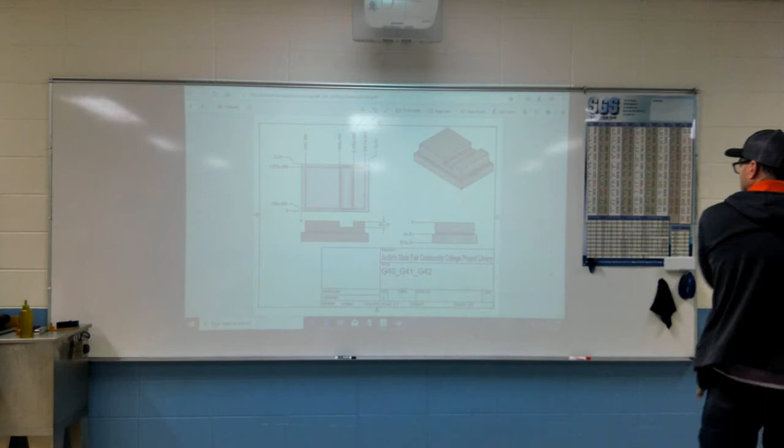So here's what I'm going to do. On this particular project, the way that we run this part is like this. We'll use 1x2 stock. We're going to saw it 3 1/4 inches long. First operation is to hold it out of the vise 3/4 of an inch to the left-hand side.

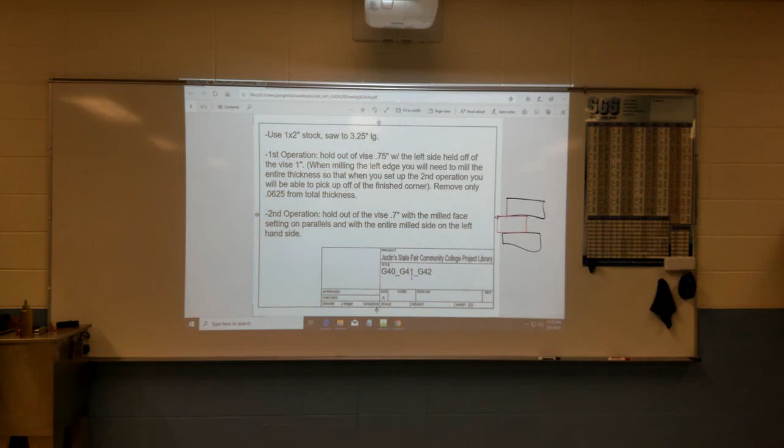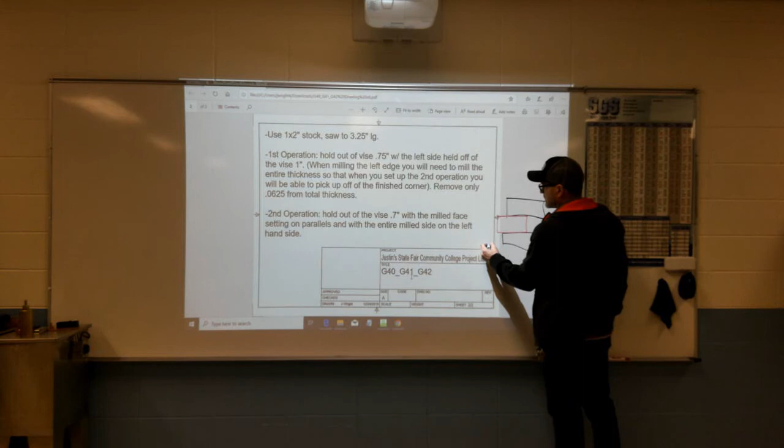So here's my vise. Here's my part. Okay. I think I have a blue around here too. My first goal is to mill the one side sticking out, this side, yes. Go in, go up, and go out. Yes. In, up, out. Okay. So G41, G40. So I got a start point and end point going up like this. Yes. Okay. So that's all I have to do.

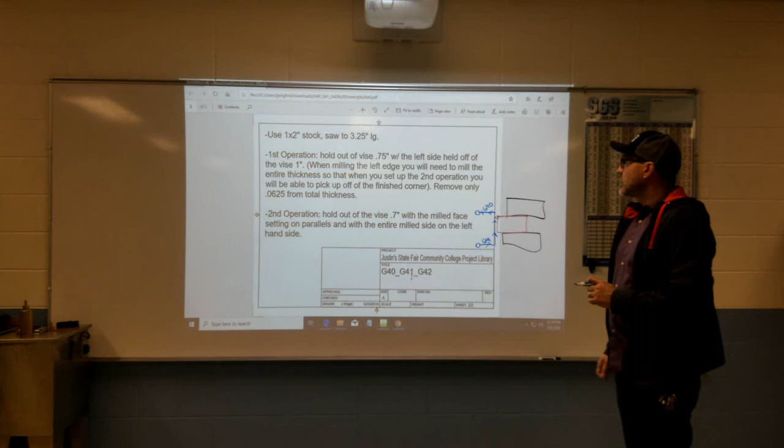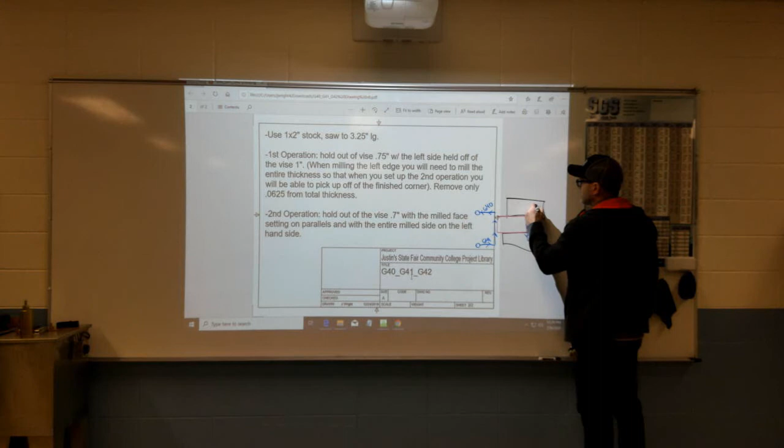Second operation is on the other side of the part. Yes, it's going down all the way. Mhm. Yeah. So on the second side of this, you're going to come in here and do this. It's just the reverse of it. Okay. So that way your cutter is continuously on the left-hand side of the part, both times. This side goes down deeper. This has to go down all the way. It does. So yes.

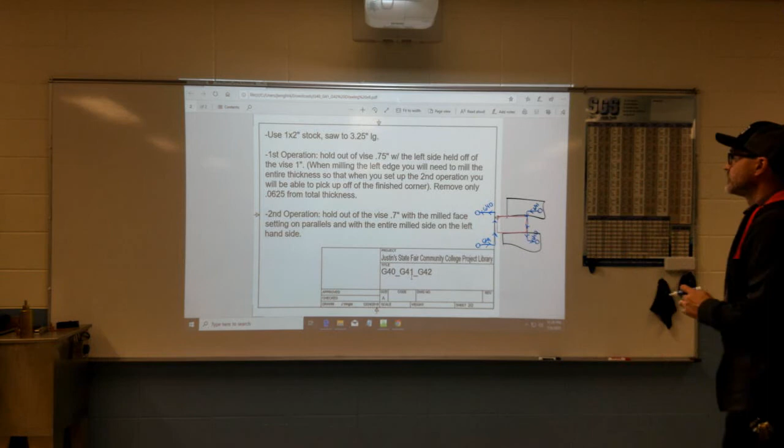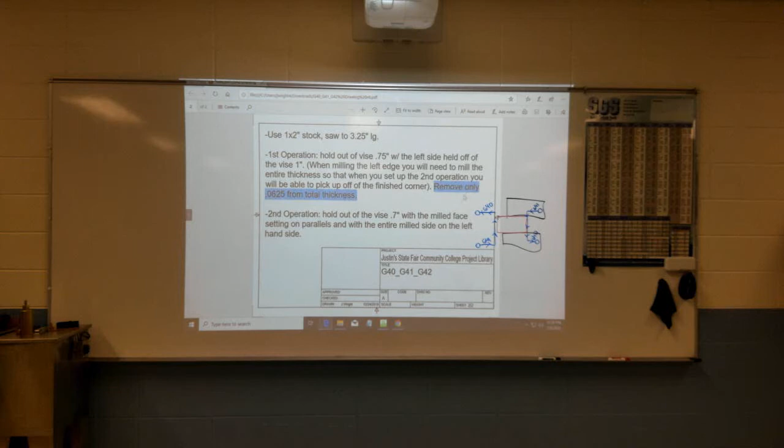So all I want to do, I'm going to grab one more color. Thought I had a green. Okay, now we're going to go ahead and go in and just kind of map out all these moves. No green. Let's see. Use one of these guys. So these will be my moves. I don't have green, so we're going to face mill across it.

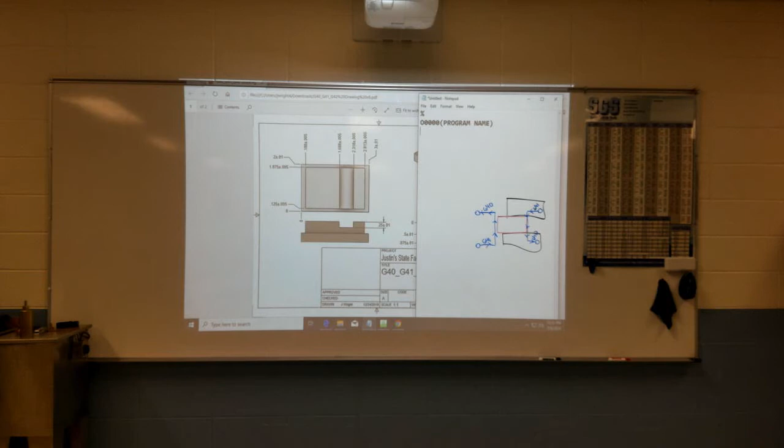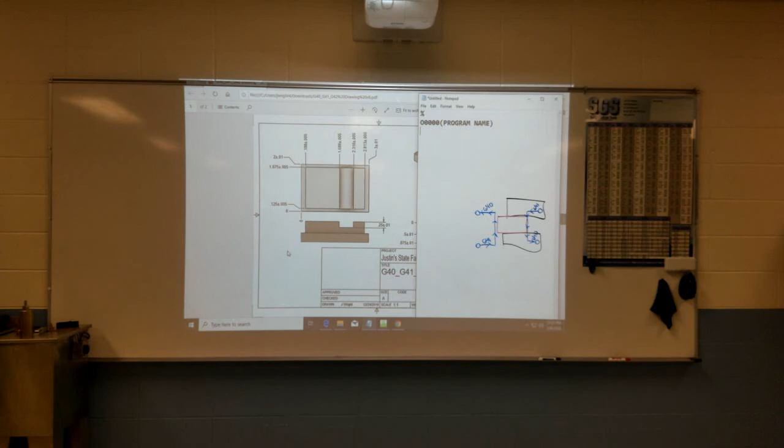Okay. The next thing I want to have is some information about how I'm setting my part up. It said 1 inch away from the vise, stuck out of the vise for the first operation, but it only tells me how I want to pick up the second side. So what I want to do is probably go ahead and probe 4 and 11 using the probing system. If I don't want to do that, still my X0Y0 is going to be in the middle, and I just use an edge finder for it.

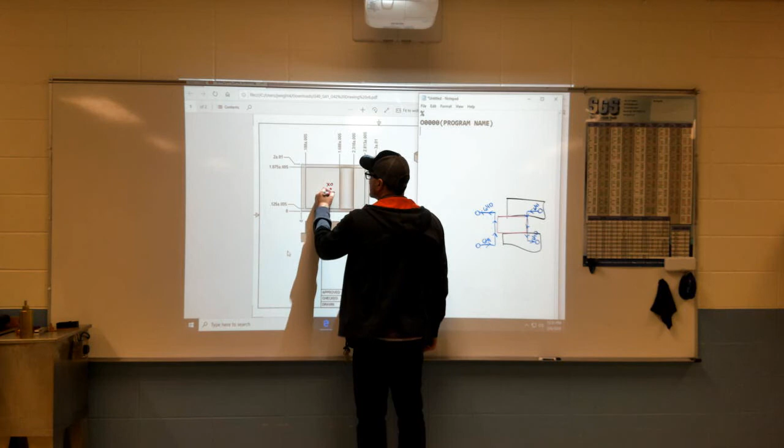So the advantage in making the center of our part X0Y0? Because you can do the same thing on this side and just turn to negative. Bingo. So I can do some symmetry on this part. That's not really the problem, like the numbers, you know what I mean? Figuring out what code means what. Gotcha.

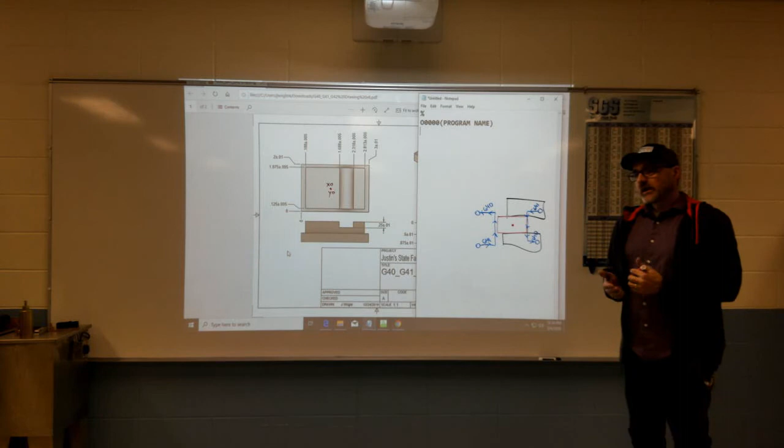So one of the really helpful things in the book is the code list of G codes and M codes, which sometimes helps, but going to the examples, like contouring, or like this one, see, it's spot drill. Yeah, and so that's really helpful. Also, you know how the program starts out with startup lines, and then we have our most commonly used G and M codes, and then cutter compensation.

So I like to look at some of these things. Like here is circular interpolation. That's something we did a little bit of today, and then we also have how to use canned cycles, and it's got examples of all those things for you. So sometimes you can see those, and sometimes it's easier. Here's some different drilling, some jumping up and down over clamps, and some of that other stuff. So some of those things will be beneficial too. This is a good one because it gives a description right next to every single thing that we do.

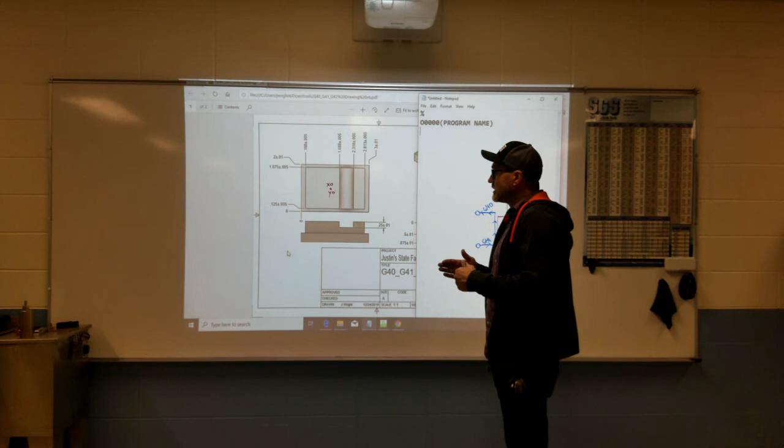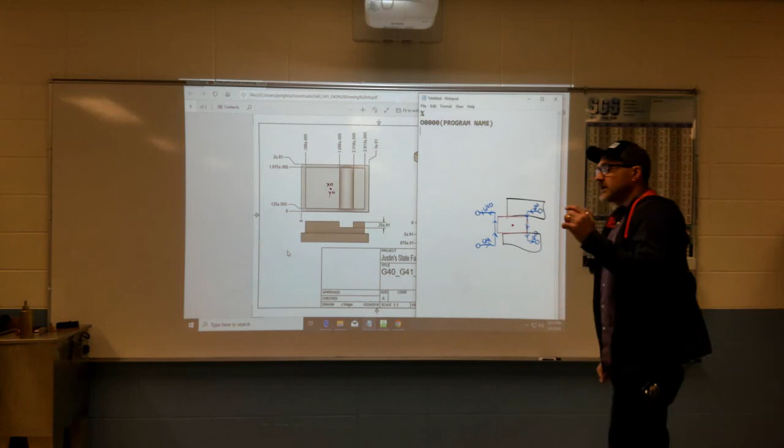All right, so you know the movements that you want to do. So if we use 4 and 11 in our probing, we've probed the center of the stock and sides. So we know X and Y, where the middle of it is, and then we did a single touch in Z, so we know that it's the top of our part. So here's our program. We're going to keep our probe in 1, so that means we're going to start our program off of 2. Yes. 3-inch shell. Okay. And so a 3-inch shell mill will be able to make one nice swipe across there, be good to go.

So I can do T2 M6, and I'm going to call this my 3-inch shell mill. Okay. Now on newer machines we can invert. It could be M6 T2, it could be T2 M6, doesn't matter. So we've got that in there, and then we're going to do a startup line of G0, G20, G40, G80, G90. Rapid movement, inch input, cutter comp cancellation, canned cycle cancellation, absolute programming.

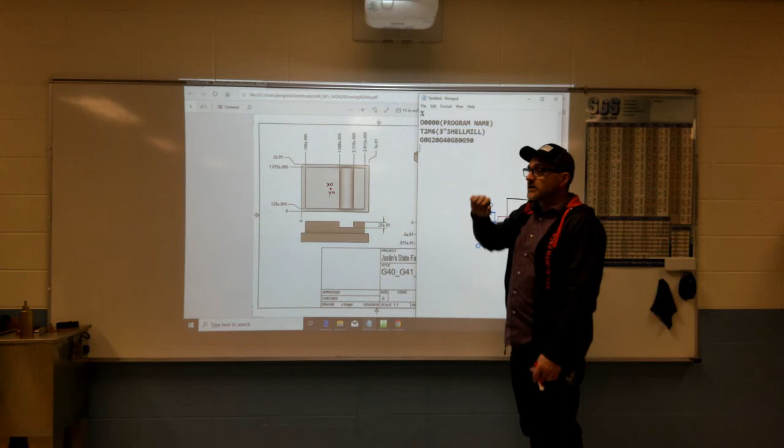Okay. That's on startup lines. All of those commands are listed there. You need to know those because G0, if you had a G1 or G2 or G3 active and you bring in a G0 at the beginning of your program, it'll cancel out all those things. Now, we don't hardly ever run metric. We've never ran metric in your classes. So all of our machines are currently running in G20. But if I put that inch input, it just takes one code, and then I don't have to worry about it anymore.

Cutter comp cancellation, in case somebody stopped the program before I got to the machine and they were in the middle of cutter comp. Sometimes we'll go over to a machine and we'll stand there for 10 minutes trying to figure out what's going on with it, not realizing that somebody either had it in cutter comp, in a canned cycle, or in incremental. So you only need to put that code once? I put those at the beginning of my tool changes. Right. So I put it at the beginning of the program and every tool change. That way I can start up the program anywhere.

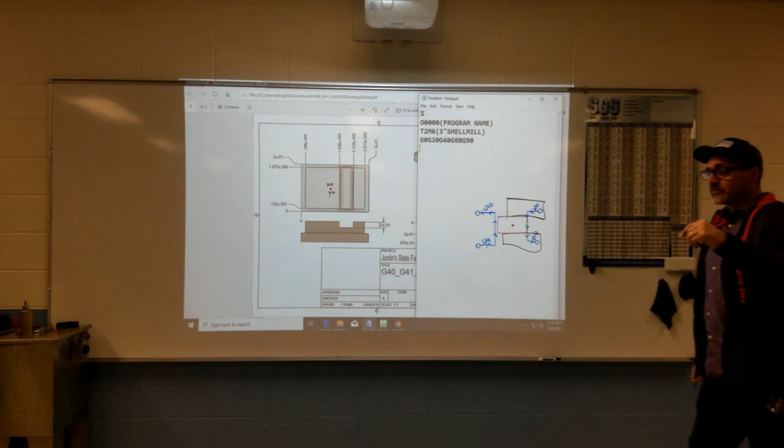Now, there's a sequence restart or starting at any point in the program too, but this is always a good habit to start. So I gave you 2 examples in the book of common startup lines, and are all of those things necessary or not? So let's look at those. Okay, is a safe start necessary? And here are some examples. Two of the same thing. See, one has the G90, G54, G0, and the other one has just a G. Well, they're just kind of rearranged differently. Some information's there, some information there. Is one way better than the other? That was kind of what I'm asking you in there.

So I've got my X0, Y0, my Z0 on the top of my part. I've got my shell mill not started yet, but I'm getting pretty close. So I want to go ahead and call up my work offset G54. At this point, I'll typically go ahead and make my X and Y movement. I wouldn't have to, but I would like to go ahead and combine some stuff. So if this part is going to end up being 3 inches long, where do I need to start my shell mill at? Or you want to at least be a little longer, so negative 3.5. Negative 3.5 will be pretty darn good.

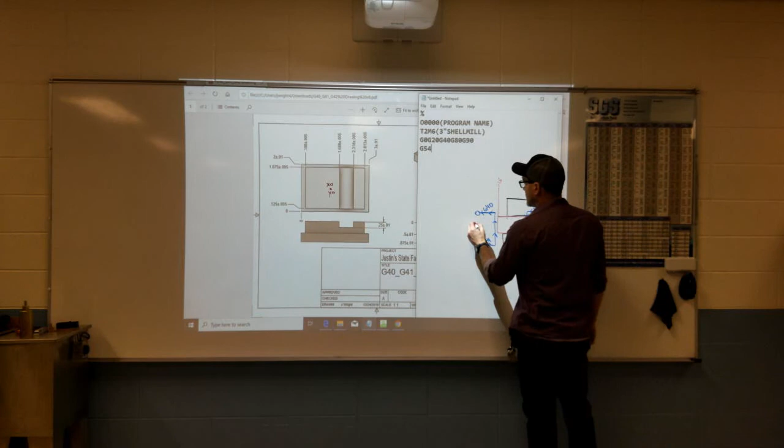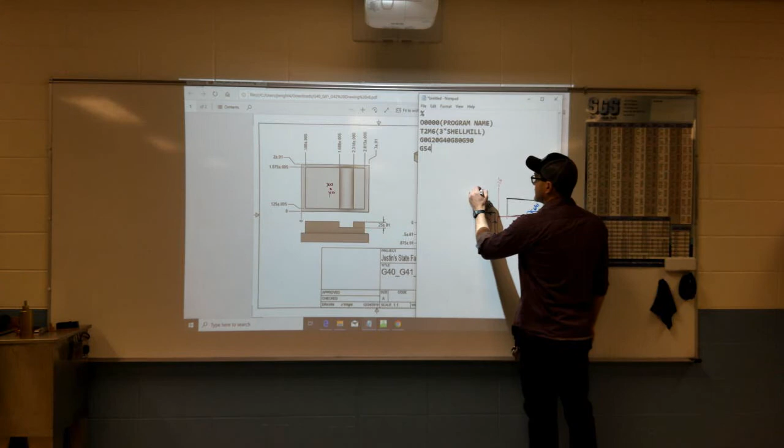So we'll do the shell mill in red, and let's just say this is a 3-incher, and it is going to be X minus, what did you say, 3.5? Mm-hmm. Okay. And it's going to be at Y0, right? Because this is right on center line.

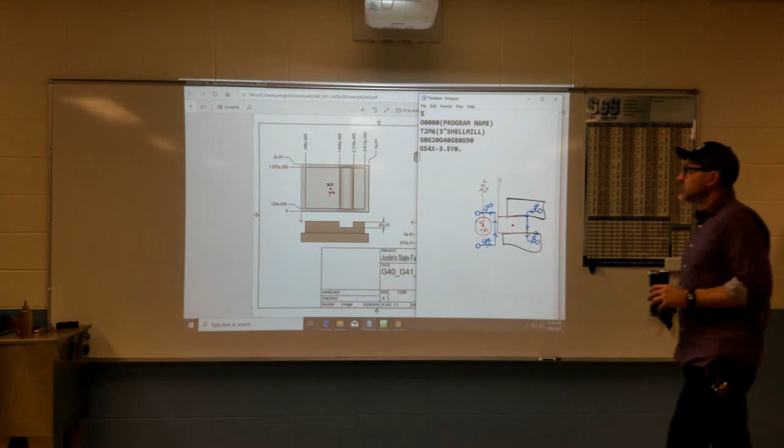So X is going to be X minus 3.5. And Y is 0, yes. Make sure you have periods after there. Periods matter. On periods, do you put them in everything? I put it in everything that's a whole number. So obviously I've got 3.5 here, but I don't put a period after the 5. I put it after the Y0. But if I had a spindle command after that, S3500, I would not put it there.

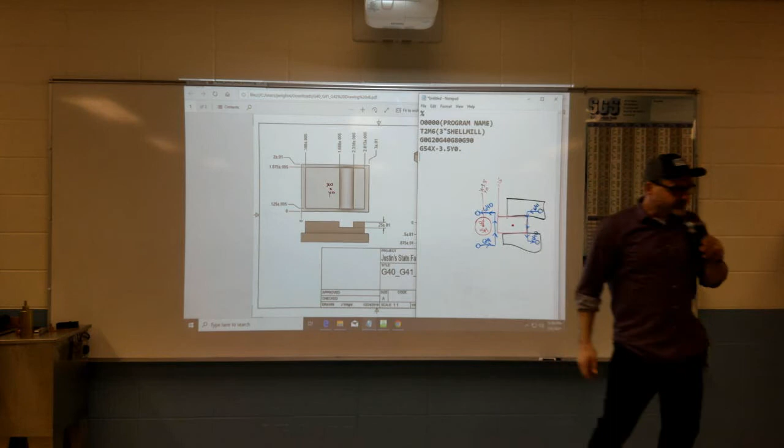If I was going G1 4.5, just a point at 4.5. Just a place where it needs to designate a whole number. Because if I just put X, Y0, it'll go to the smallest possible scenario, which in this case would still be the same thing, 0, 0. But if I wanted to go to 1 and I didn't put the decimal point, it would go to 0.001. See what I'm saying?

Yeah. Okay. So I've got this part started. I've got my tool called up. I've got my safe start set up. I've got my X and my Y. I don't have any spindle speed, and I don't have any downward movement yet. So do you remember what the spindle speed was that we used on that? 1018. 1018 sounds correct to me too. So S1018. No decimal point after that, that's just a number. That starts my spindle up.

We pre-calculated that using the 3-inch shell mill. It's got 5 inserts in it, and it is in aluminum, so probably a 800 surface footage is what we had used. So that starts up our spindle. Next thing we need is a G43. G43 gives a signal to the machine that we're getting ready to put a height in here. The height that you put in the tool library in geometry, that's where it's going to draw from.

So we're going to put G43 H2. You will put a Z, but right now you're going to have H2, so that H matches the T. And then you're going to put a Z of 1 inch, so it's going to go down to 1 inch above the part. I want to do a couple of safe moves there: 1 inch above the part, and then Z 100 thousandths above the part. That's still in rapid, because up at the top underneath that T2 there's a G0. We have not gone into a feed move yet.

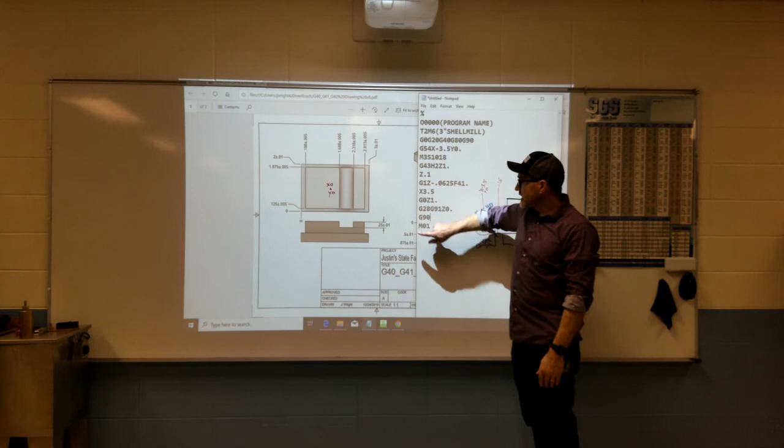To be 100% honest, you could put none of these things in here, put an M01 or M1, and then put a tool change in there, because tool change has to go all the way back up. So it could actually - but you don't need to change tools. Yeah, you will need to change tools. This is just a couple different ways of doing this.

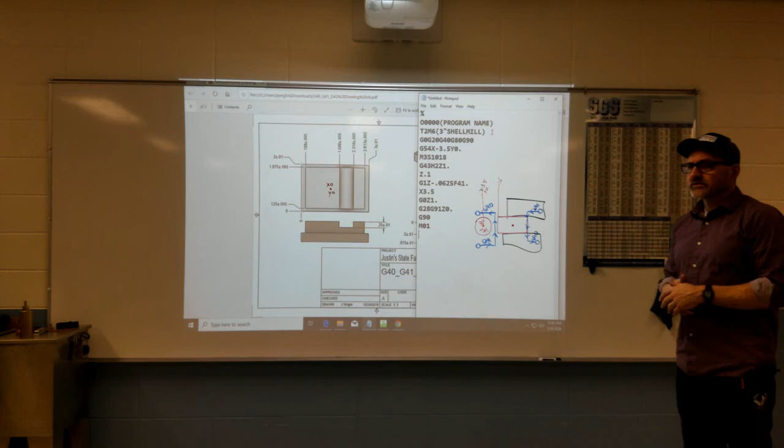I think everybody's got their own kind of groove on this, so it's kind of important to figure out what your groove is. Like when I'm writing or running a program I've just run, I kind of know the things to look for. I know my first lines are typically my startup lines, and since I've written enough of them, I kind of know how the block of code lays out, and I pretty much write it out the same way every time.

All right, so now I'm ready to start. I'm done with that shell mill. I'm ready to go into my next tool, my half-inch end mill, and start running the sides. So that's going to be M6, T3 - we'll just put half-inch, 2 flute end mill. Okay, so I can borrow this code here, just copy and paste it out.

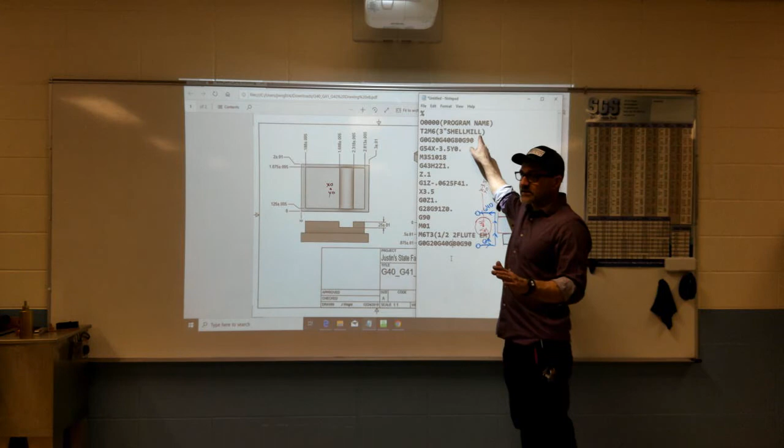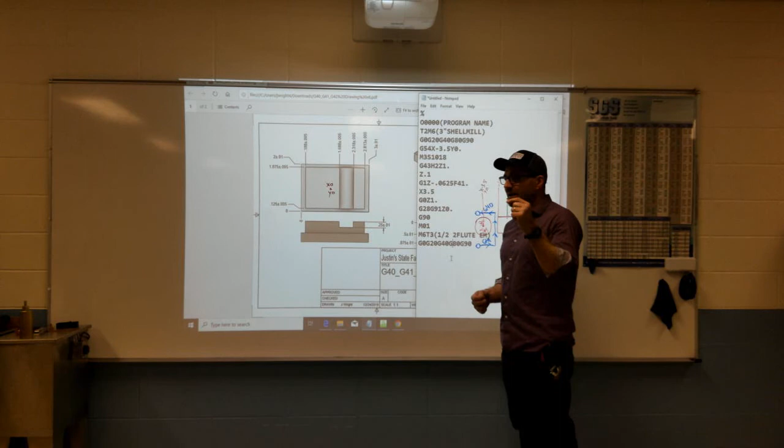For all intents and purposes, we would actually be able to not even put that in there. We've not moved away from 54, all of these things stay the same. We should just be able to stroke right on through, not even put a work offset, just in case. Exactly - if I don't have sequence restart turned on, setting 36, or if I stop my program midway and want to start at a tool but haven't run anything else, I want to give myself some safety factors in there so I can get started back up again.

Okay, so I'll do some of the same stuff. All of these things will be brought back into it, but there's just going to be a little bit of different X and Y values. So we're going to have a X value of negative 2.5, okay, for X, and negative 2 for Y.

Okay, and then what do we have for an RPM? Do you remember? 4,800, 4,800. Okay, and so now I've got T3, so my H3, H and T have to match. So I go to 1 inch and I go to 100 thousandths. I'm still in a rapid move.

On this side, I need to mill the entire height of that part. So on this side, my end mill needs to go there. Over here, it just needs to be like that. Okay.

So you already got the numbers from that. That's good. So we'll go ahead and go on down. Our part is just shy of 1 inch, but our top of our part is Z0. So we're going to go down to Z minus 1 should take care of us. Okay, so that's still in a rapid move.

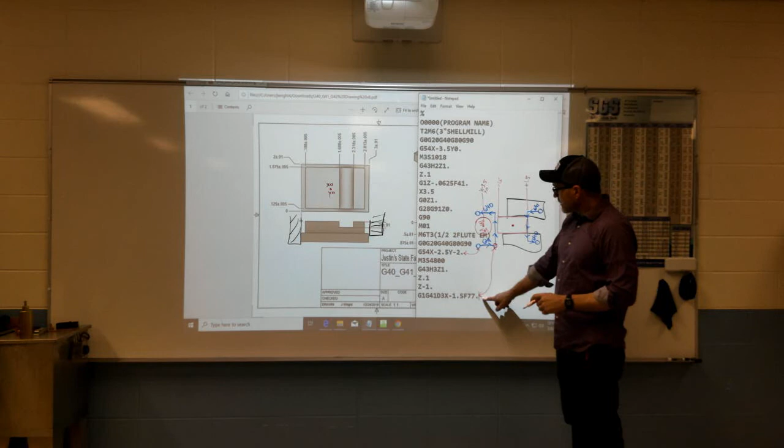Okay, so here I am ready to start this travel up.

And now I'm going to go to, I'm already at Y minus 2, right? So in keeping that symmetry going, I'm just going to go to Y positive 2. Okay, from there on out, I'll just travel up to Y, 2 inches, plenty of room, more than enough room. Now I'm just going to travel back here. You with me?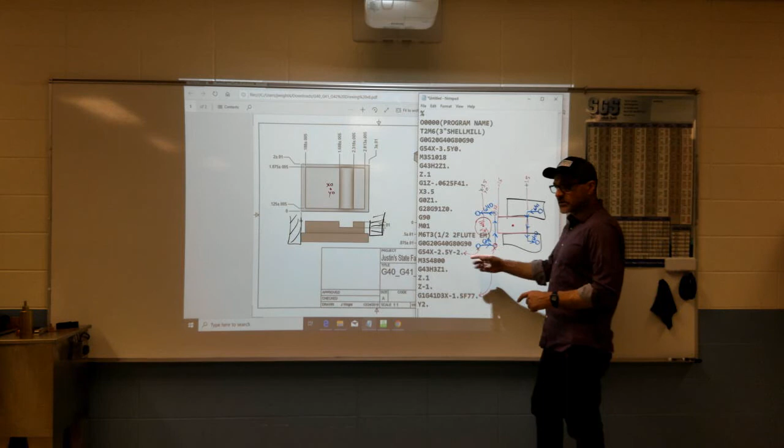Are you on cutter compensation? Yeah. Okay, so all I'm doing is cutting up this side. So I came from here to here, turning cutter compensation on. You with me? Yeah. Then I travel up here. That's this move, it's right there. Okay, now I got to turn it off and come away from it.

G40 X minus 2.5. And that turns cutter comp off. So this move is right there. This move is right there.

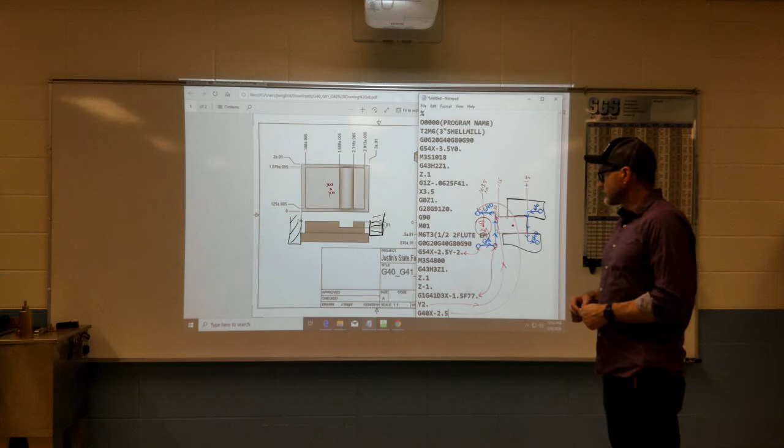Make sense? So G1, G41, and D3X, that turns cutter comp on? No, this turns cutter comp on in a feed move. The X is the positioning of it. Right.

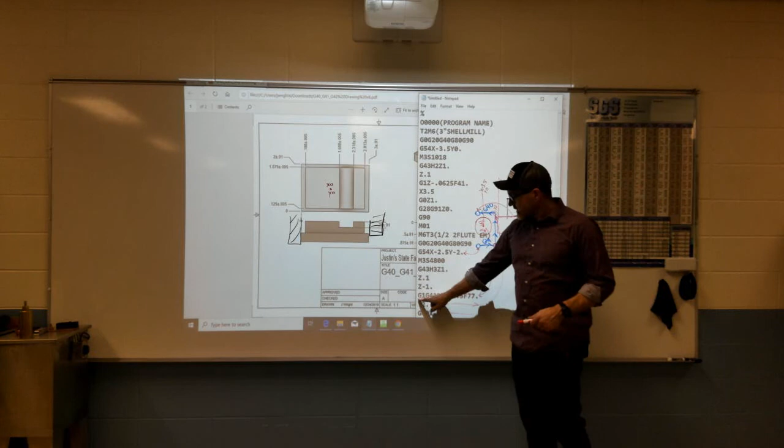This is a feed move, right? These two, this is cutter compensation to the left. This is what diameter are you using? Well, you're using tool 3, so your diameter comp has to be 3. Okay, so the D3 is diameter. Got to match that. Okay.

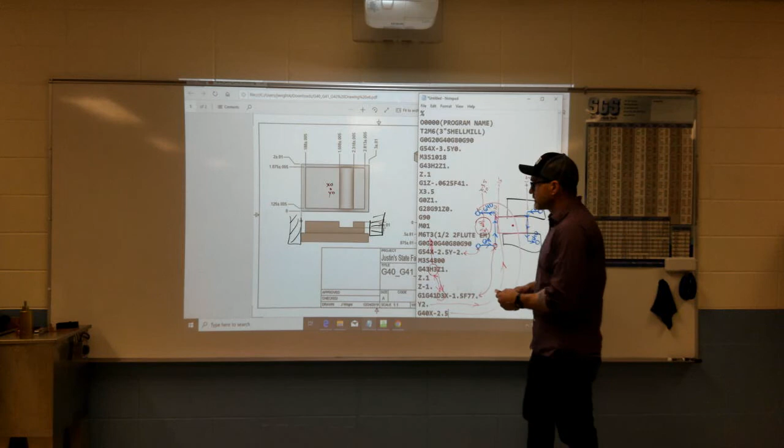So you got a couple things. They all have to match. All 3 of those pieces in that string need to be the same thing, right? And so that's just the X position, and then that's just the feed rate.

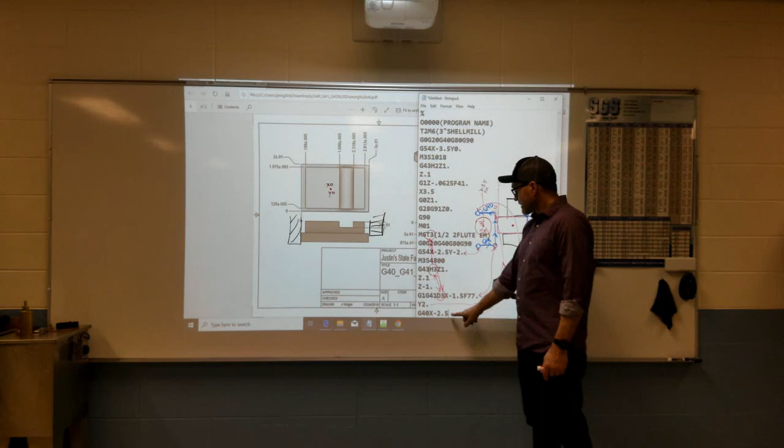Okay, then we're going to go up to Y2. We are going to turn it off. Then go over, it's got to turn off in a feed move. So we've got to feed away from it. You can't just do a G40 at the end of it. So that takes care of that. Are you with me there? Okay.

I'm not sure where Sean is. I was really hoping he'd be back here. Okay, I'm going to erase some of these things.

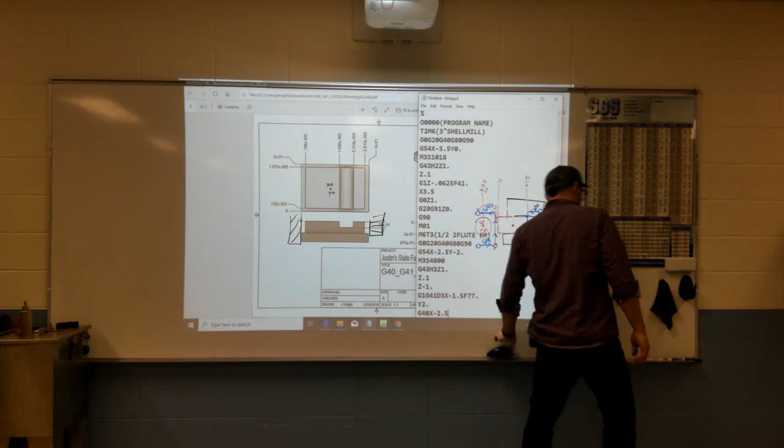I'm going to move up in this program some. We're not done with this tool yet. So all we did was come over here and turn cutter comp off. Now we need to move up, over, and just do the opposite, then reverse it. It's super simple from here on out.

Okay, so I've turned cutter comp off. I'm in a feed move, so I'm going to go G0, Z.1. That puts me up above my bar. Now I'm going to go to X2.5, still in a rapid move. I'm going to go G1, and go Z minus 0.650, because I said the part needed to be sticking up 3/4 of an inch. I don't need to put a feed rate on there because my feed rate from here still tracks. So now I'm over here at this point.

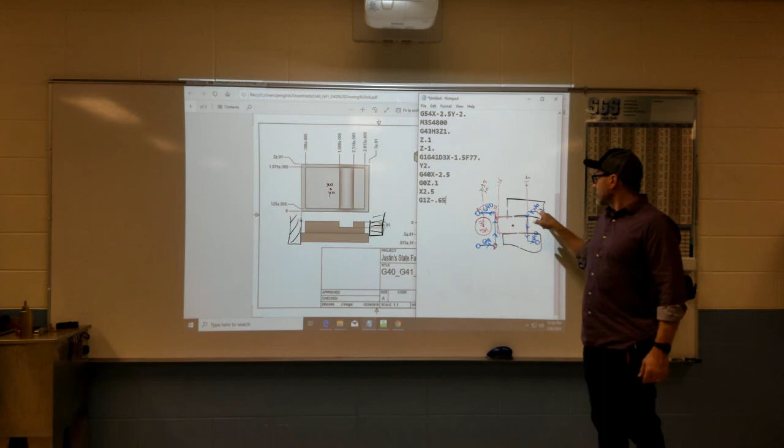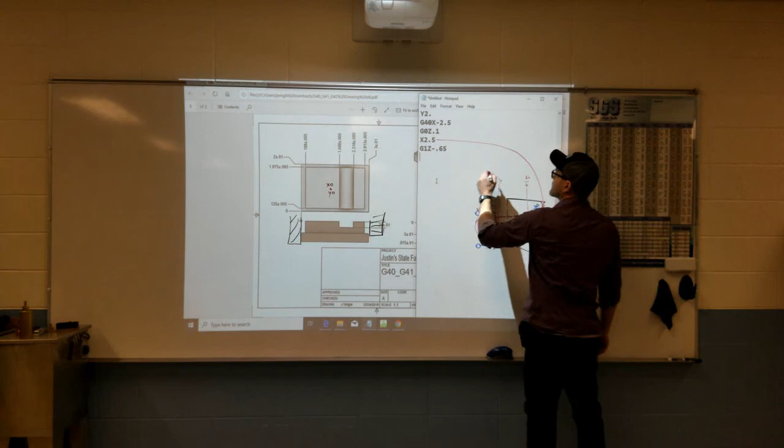I'm going to move up just a little bit, and then we'll draw some arrows as we go. All right, so I've rapided - can't see the Z move, but I'm down where I need to be.

Now I'm going to go G1, G41, D3, X1.5. So I'm right back where I was, right here again. These two things are mirror images, so I'm just going to go like right there.

Okay, now I'm going to feed down in Y. Is it -2? Yeah, it must be. Yes, please. Now I'm going to do that same G40 move, go into X2.5 maybe. Okay, and so I'm done - that's the whole backside of my part.

So now all I've got to do - yeah, well, I need to finish this program out. So I could do a G28, G91, Z0, then G90. I could do a G53, Z0, whatever I want to do. And then I won't put an M01 there, but I'll put an M30, and then a % sign into my program. Yep, so good to go there.

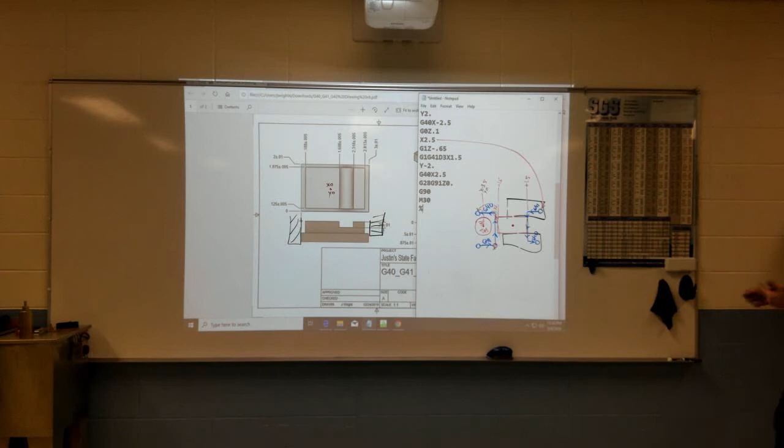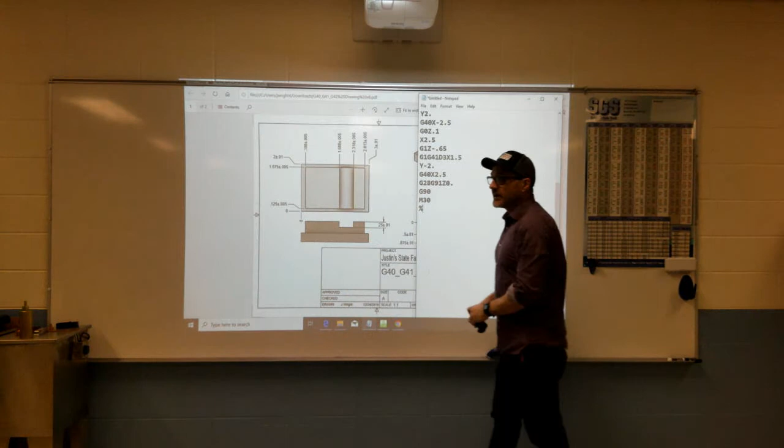I think it's really good, especially in those kind of beginning moments, to kind of draw the thing out as you go. I have a drawing on paper. Yeah, it helps - you're welcome to take as many pictures as you want, just to help remind you of what we're doing. I'm going to go ahead, since I'm already here in this notepad, and just keep on writing on it, because I'm not planning on running this.

So I will start out with my shell mill again. I'm going to change my numbers just a little bit, but I'll go ahead and do a duplication of this. I'll call this 1. Okay, the only thing that's changed here is where my X0, Y0 is.

We milled that one side all the way down, and then we milled that one side shallow. We flip it over. We wanted that one side to be milled all the way so we would have a good corner to pick up on. So now we can come in here and do a top single probe in Z, and then a corner probe for whatever corner that might happen to be.

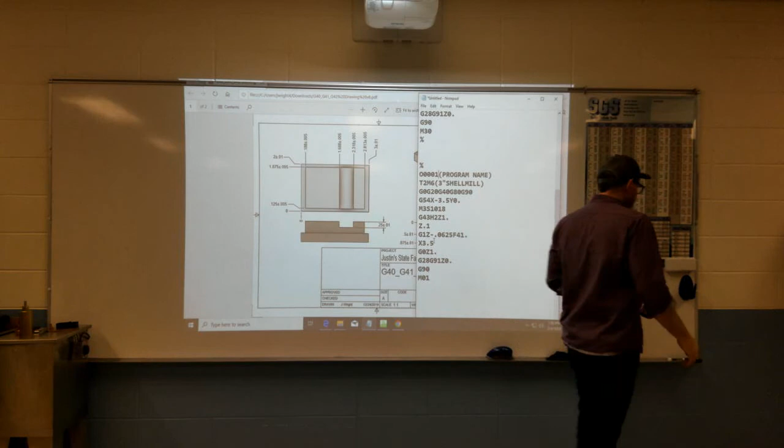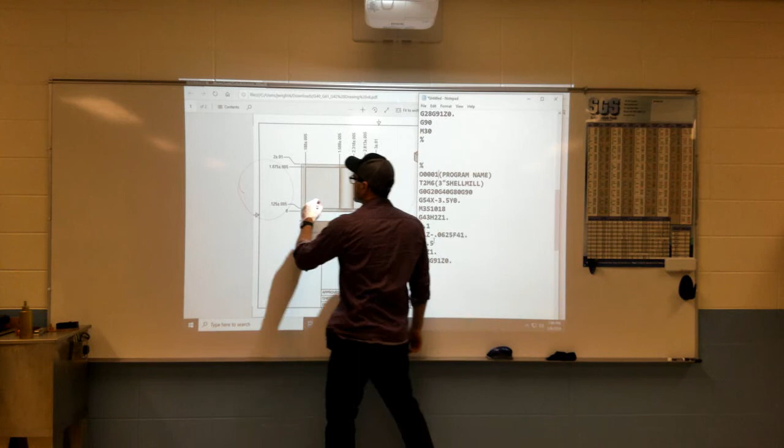Actually, probably 1. So I've got my shell mill, turned it on. I need to change both my X and my Y. Where do I want my shell mill to start out at? Same thing as we had it over here - negative X-1, X, Y-1. No, that's probably more for the end mill. So X0, Y0 is down this corner.

Okay, I've got to come off the part at least an inch and a half. So it's 2 inches thick. 2 inches? Yeah. Okay, let's go -2 inches, and Y0. Okay, that puts me in the middle. And also off - yes, he's off to the edge.

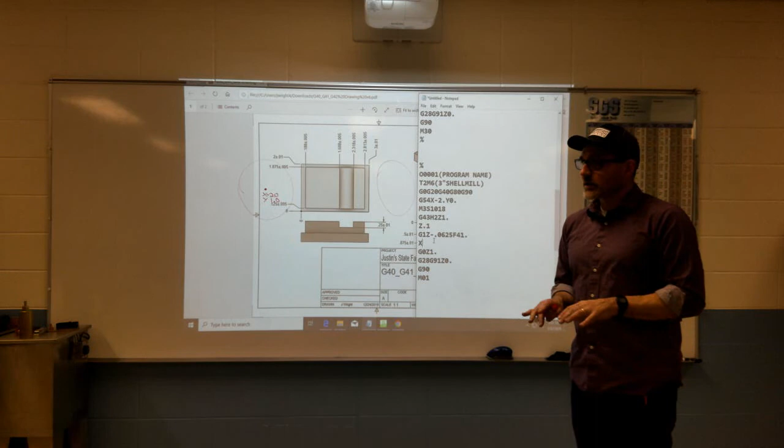So see how all that stuff kind of stays the same? That's why I really encourage people, if you have a laptop, you can be sitting here doing it on the laptop as I do it, and copy and paste along with me. I like the idea of doing it on paper, but man, it's hard to copy and paste on paper and do it with the same speed. So like a couple guys - Brandon, he's one of the guys who is quick to be on the laptop as he's doing it, that way you don't end up having to go over to a computer and work off of it like that.

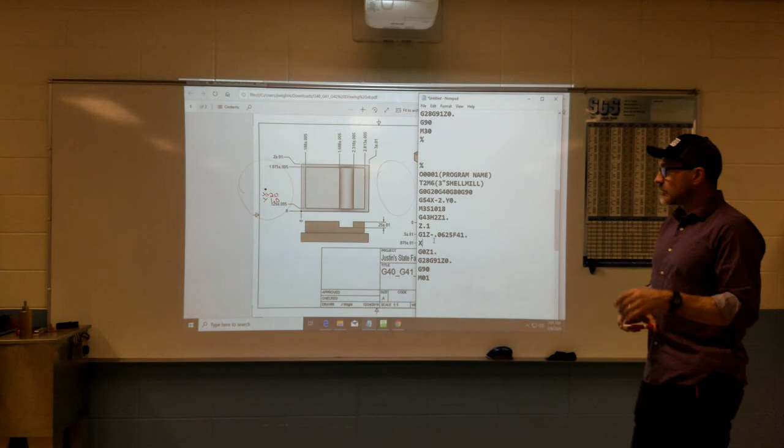Notepad will run on any kind of Windows cheapo computer, so you don't have to have anything fancy. So if you've got a laptop, it won't hurt you to have it. So we've got to overcome at least 3 inches plus the radius of our tool, which is 1.5 inches.

It's 3 inches long, so do 4.5 - at least 4.5. 4.5 will take us off the edge. So let's go 4.6 just to be on the safe side. That takes care of us. We're off of the part now. We're done with that.

Okay, so now I'll go ahead and grab my 1/2 inch 2 flute end mill, and I'll go ahead and grab that out here. Copy that.

Paste that in. So there's my tool. There's my startup. My X and Y changes. My spindle speed stays the same. This stays the same. This will change. Let's see, what will it change to? It's got to go down 1/2 inch.

Now, here's the tricky part on this. We actually have to mill down lower than 1/2 inch because we took 62 thousandths off the top of our part. This is really the one and only program that will run like this. From now on, I want the top of the part to be Z0.

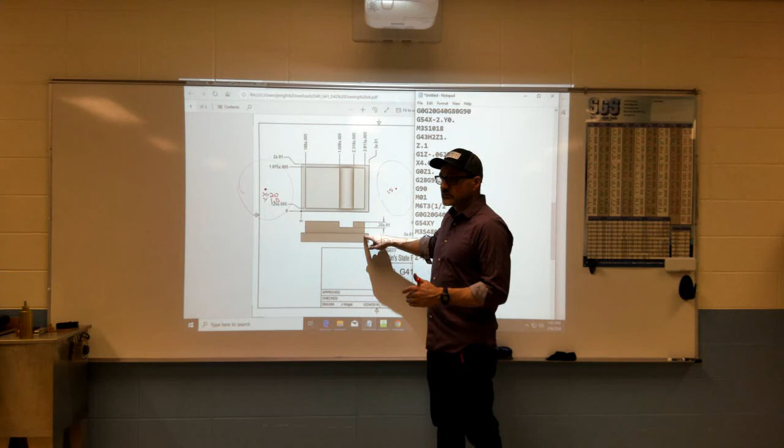Overcome that area. Yeah, I thought you were Sean.

Okay, so I'm now down to 62.5. But I did not put my X's and Y's in order yet.

Trying good? Happy with it? Good, looks good. Wish the chamfer was a little bigger, but it's in print, so. Yeah, it looks nice. I didn't know it was sweet. That end mill is sweet.

I'm hoping to. I can't do it this budget year, but as soon as this budget year is over, so July, I will probably buy it. It's probably the end mill that I'll be going to for now. Jeff goes, you're the only one in class who can get one of those. But honestly, luck of the draw.

I didn't want to go get my keys. And the only reason I did that is I didn't want to go all the way upstairs, grab my keys, come back downstairs, get into the tool room, and then come back.

You said those were like double the cost of our carbide inserts? Those are about $75 a piece. That's what we paid for them. That's not that bad, I think MSC sells them for like $130. We paid $75 for those. So I'm gonna start doing those in 1/2 inch, and I think I'll probably start doing them in 3/4 inch.

So hopefully next semester. The bad part is those will cut right through vices. Oh yeah, those will cut right through anything. I know, yeah. Vice jaws, who cares? I'm super happy with them. You can't hardly spin them fast enough, you can't hardly feed them fast enough.

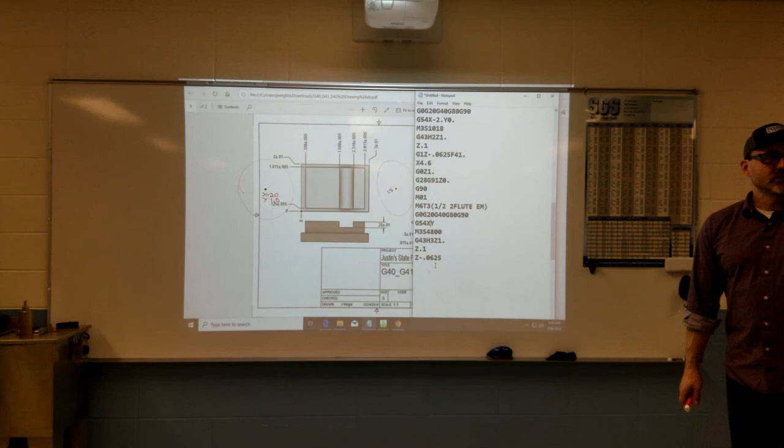I will tell you what I put the detail grinder use to cut stuff with, but we don't want to do it. Right, put in a 1/8 inch carbide and they'll go. Sure, yeah, guys did that, definitely you can come out with like this. You can easily come out missing digits.

That's pretty terrible. It's a terrible weight loss program. He knows how sketchy it is. That detail grinder spins at... it's 2,200 RPM, yeah, I mean, it can take off, that's for sure.

All right, we've got to come - we've got to position our tool somewhere around here. I think you already had the number of 1-1. We've got to turn cutter comp on. We've got to go around this part.

We're already at depth. We need to figure out where we want to start at. I think you had already told us: X minus 1, Y minus 1.

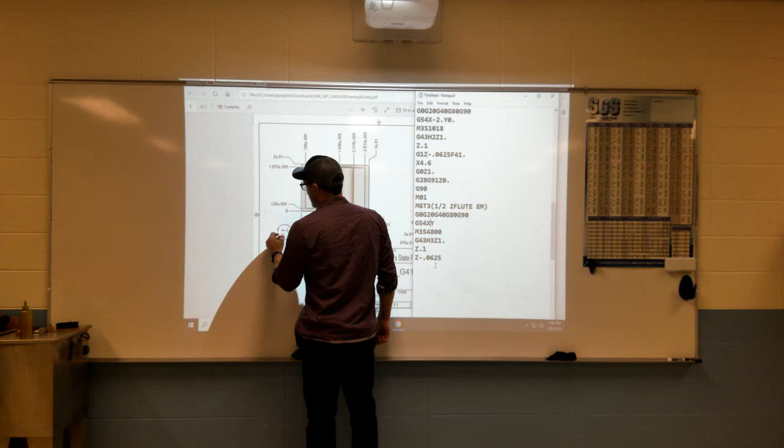That's a little far out to start, but that's going to be fine for us getting going. So that means up here I'm going to hit X minus 1, minus 1. Okay? So there I am.

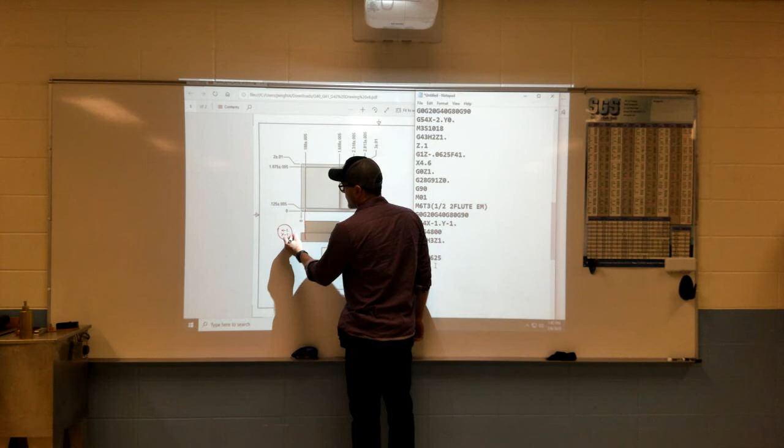I'm already at the position of where I need to be. So what I need to do is travel from there. I need to come into this line. So that corner is 0, 0, right? It is. This corner right here.

So I want you to travel in X to this edge that I just drew. It's 1.2588 coming, right? What's that? 1.88, 0.188. So don't overthink it, that's all you got to do. You've now created this tool, it'll be positive 0.188.

So I'm going to go G1, G41, D3, and I'm going to go to X 0.188. Now that drives me right to that edge. Okay? So now all I got to do is go up all the way to here.

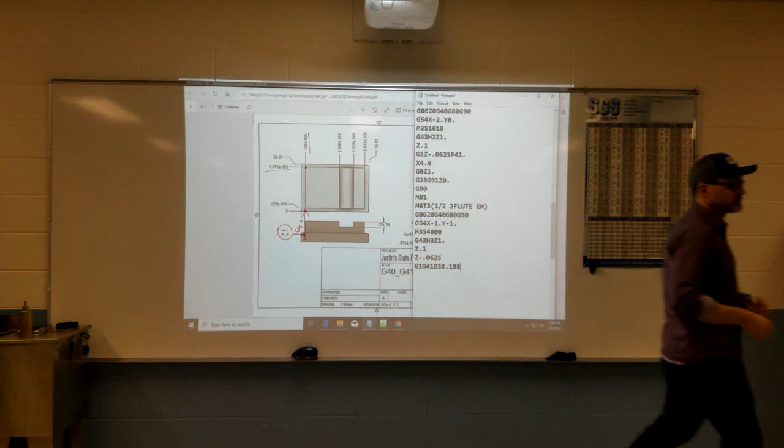So where is that? 1.8, got to go to step 1.875. Y 1.875.

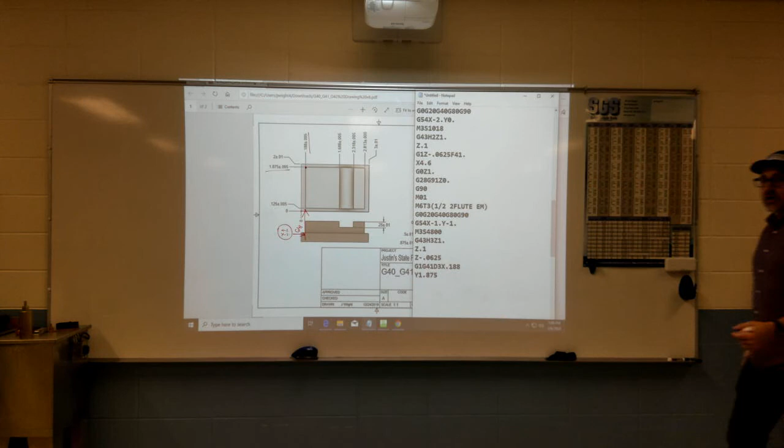1.875 negative, right? No, we don't have symmetry anymore because zero's here. So what is this? Look, there it is right there. 1.2, 0.125.

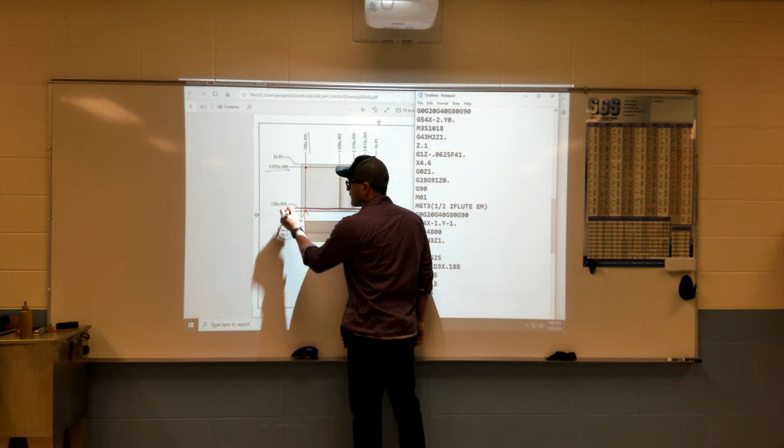Yeah. Okay, so I'm down there at that bottom edge. Now I need to come all the way back over here. This move gets a little bit different than what we've had before. So we're going to go all the way across here, and I actually want to travel beyond that. I want to go all the way to X of negative 1. So you would put X negative 1, and it'll just take it right across it. Yeah, just going to go right on past it.

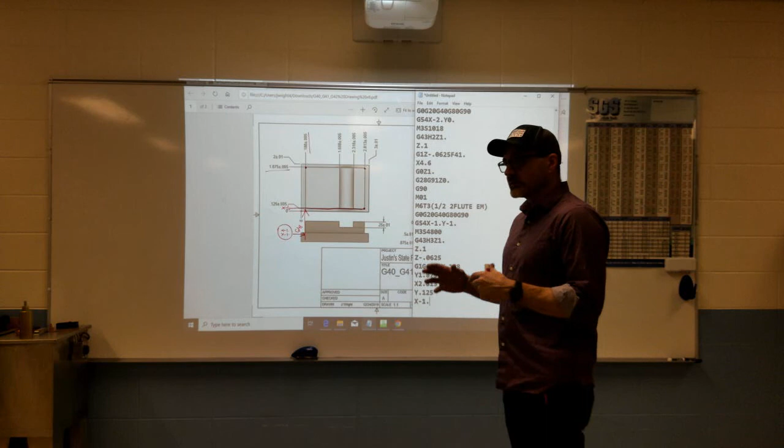X minus 1. I mean, if I'm trying to really, if I'm going to make a million of these, I've tightened my moves way up. But for what we're doing right now, it's okay to be just a little bit chunky, come off there, just a little bit of air cuts. So now I'm going to come down here to Y of minus 1 and turn cutter comp off.

Okay. From there, I have milled the bottom side, now the top, I've milled both sides. I've milled these edges. I've milled all the way around this slot. Only thing's left, I'm over here at negative 1, negative 1.

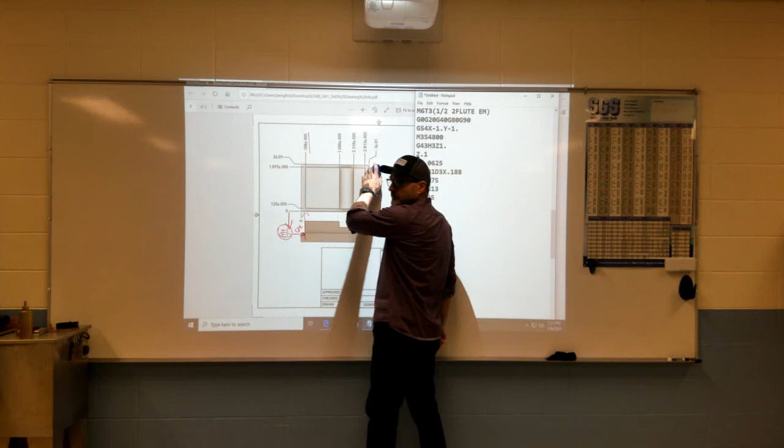Okay, I need to get in here and I need to cut this slot. Here's how I want you to do this slot. There's an easy way to do this slot, there's a hard way to do this slot. I want you to do it the hard way. Anybody can do it the easy way.

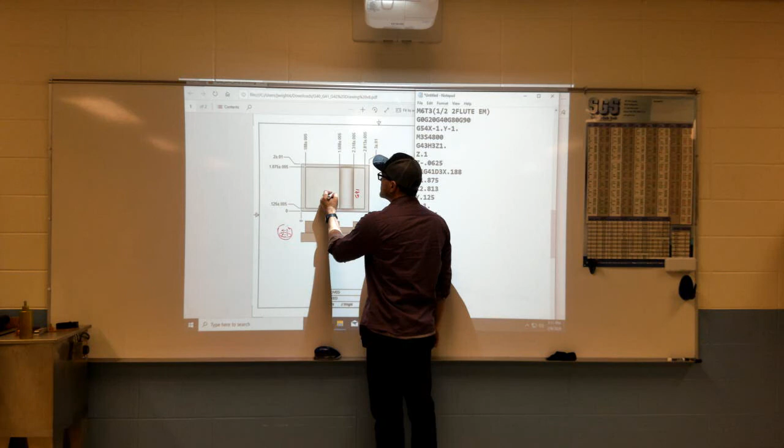So I want you to go up this side, going G41. Then go down, going G42, right? I actually want you to go up the other side and go up G42. So here's how if I'm going to make this part. I'm going to come up this side, turn cutter comp on G41. I'm going to come around and I'm going to go down and turn cutter comp off, all in G41. But I need you to make sure that you know how to use both G41 and G42.

So you want me to go all the way up and come right back down? I do, I remember you saying that. Yeah, so I'm going to change some colors here. So I want to do this is your G41 side. This is going to be your G42 side.

So would I machine it like this under normal circumstances? No, but I want you to know how to do both of these things. You'll rarely use G42, but if you know how to use it and you don't use it, that's okay. But to need it and to not know how to use it, that's a problem.

Okay, so here I am. I'm over here, I need to travel over to here. I can travel straight from here and turn cutter comp on right here. Kind of a long move, but I can do it.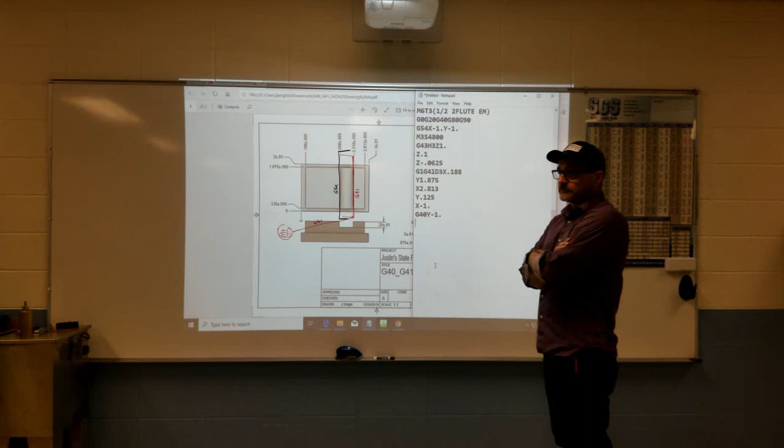Say plus 2. Plus which one? You gotta have your quarter inch dimension plus your 62.5 thousandths that you already took off the top of the part. So it's a quarter inch plus 0.0625. It's 6. You said 6 point what? 25?

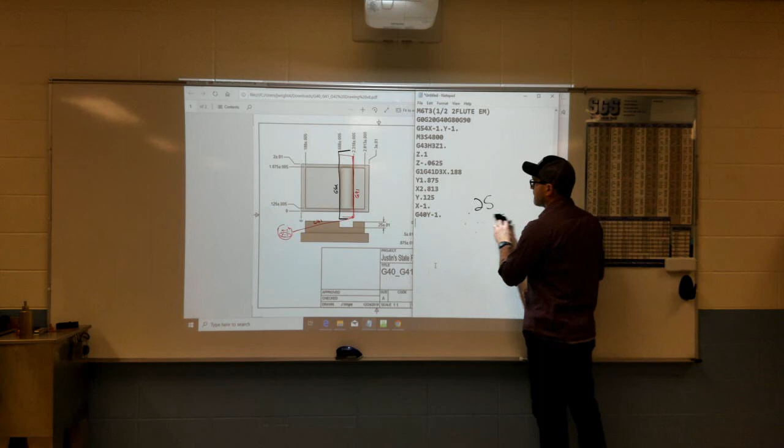Is you point. Is you 0.875 plus 0.25 plus 16th inch. You did 0.25 plus 0.0625. 0.0625. Is you 0.3125. 0.3125. So 5/16. Here's both of these. Okay.

For some reason, when we put the calipers on and measured this, they didn't come up square. Did you square them when you put them in? Yeah. I used the 4-inch square to put them in, and beat the crap out of them when I did. So let me ask you this. The bottom of the vise is like this, right? Right. Did you have that blade stretched all the way across both sides? No, that was my problem. That's your problem. So you need to have that blade stretched all the way across it.

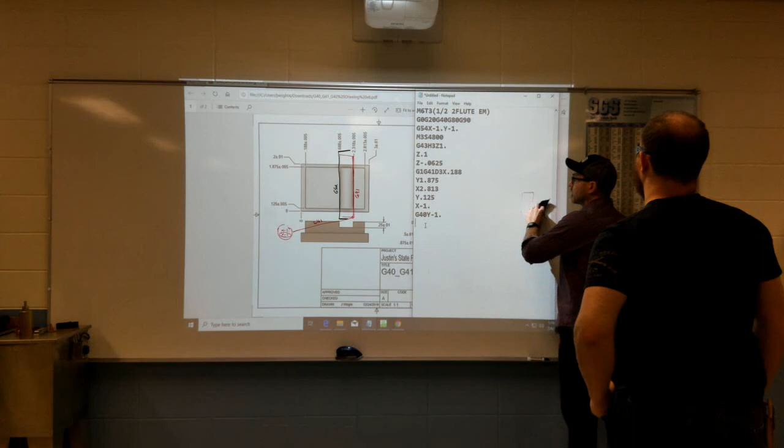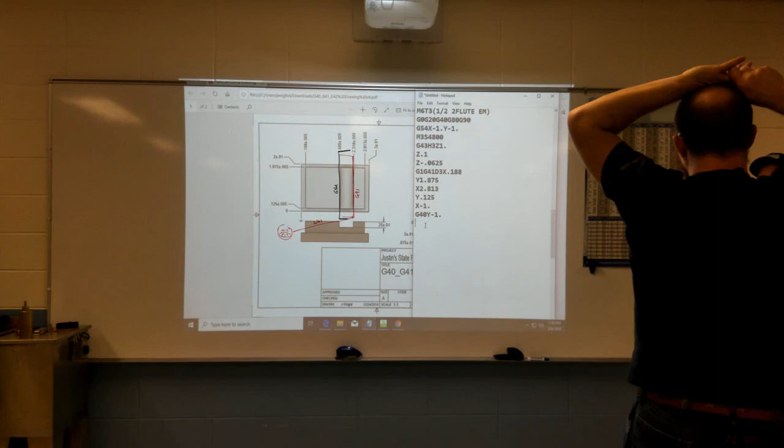Otherwise it's not. So use the thin side instead? Yeah, the thin long side needs to go down first. Gotcha. That way you can span that out much further. That's why I don't like people using the 1-2-3 block for short stuff like that, because your material's 1 inch and your 1-2-3 block's 1 inch. It gets stuck inside there. Well, the way I look at it, you gave us squares in a box, use them. I didn't realize to flip it that way. Yep, you're good. So,

They both came out to 3.13. 3 inches 130. But you didn't give us an overall, even with taking off the 5 thou. How come before you said that they were 2 inches 950? That's what the first one came out as. And then when I asked you if I should adjust my Z, you told me to take off 0.005, which I did. Point oh five. Well, there's my problem. It's all right. Okay.

Are you sure they're that far off? I measured them using Ed's calipers, which is better than my calipers. Not unless I just mismeasured completely. I think you mismeasured. Look, these are all the same. You might be off a couple thou, but you're saying they're off an eighth of an inch. 130 thou is just over an eighth of an inch. Funny. I was thinking 50 thou for some reason.

So, you'll get a kick of that if you can manage to read it. Follow simple instructions. Dang tool probe. Justin wants to slit our throats. Yeah, because we break his stuff. Those are all true statements. And that was the statement it was supposed to start with. Oh, okay. Justin wants to slit our throats.

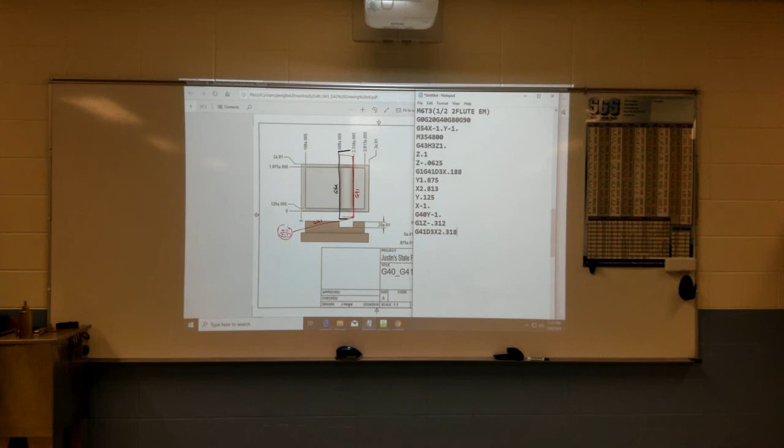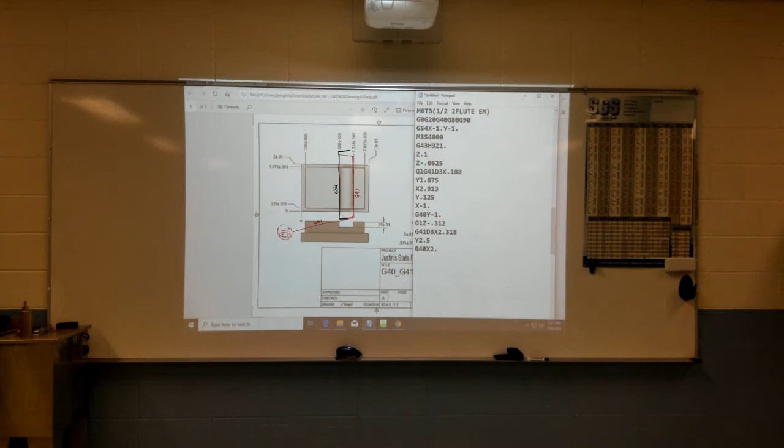Okay, that turns it on. We're going to travel up to Y of 2.5. Then we'll travel G40 X2. That turns cutter comp off there. Okay. So, this is this move. This is this move. This is this move. Okay.

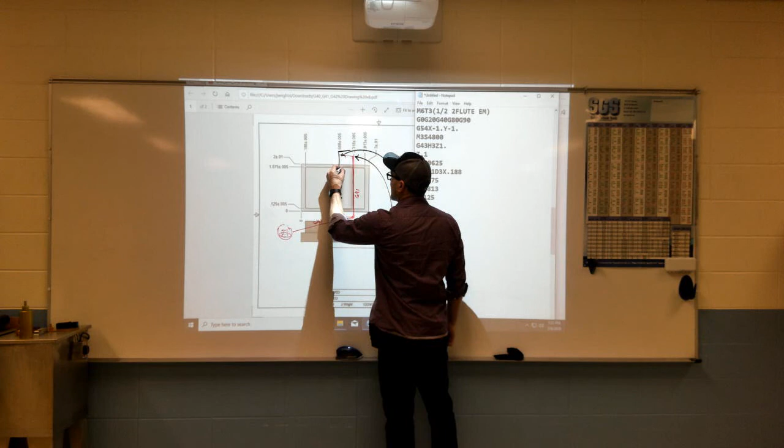So now, to cut this side of it, we've got to be back down here. We've got to run low to high. So you would want to move the spindle up. Yes, so that would be the next move. Okay, good. Yep. So I'm out of cutter compensation, so I'm going to go to Z. G0, Z.1. Just get it up over above it.

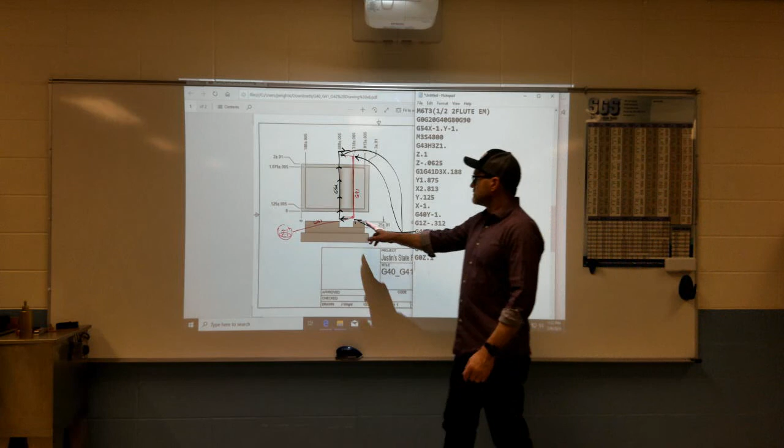And so now I've got to go back to where it was. So I need to go somewhere around here, yeah. So turn it on. So I could go over to maybe X at 2.5. I always want to find an even number. So we'll go X 2.5, Y, we'll just go -1 just so we don't do any math. Okay.

Now we're going to go G42 D3 X 1.688. Then we'll go Y 2.5. And then we'll do G40 X 2.5.

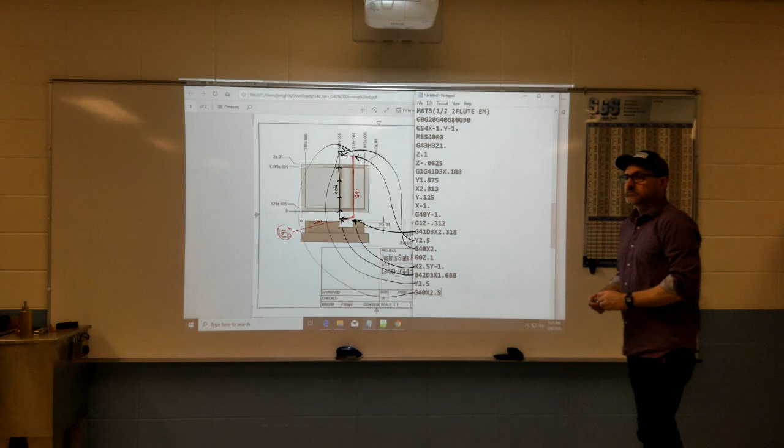Okay. So that took us here, back there, to roughly here. This takes us to here. This takes us up to here. And this takes us to there. And then you'd be done. Yeah, I'm done. Completely done after that. And so now, turn cutter comp off.

I could go grab probably something like this. And then my program's done. And maybe after this one, I may put a Y0 there too on the next line, but I wouldn't need to, so that just gets my spindle up and out of the way. Make sense? Okay. So I want you to go ahead and run this program.

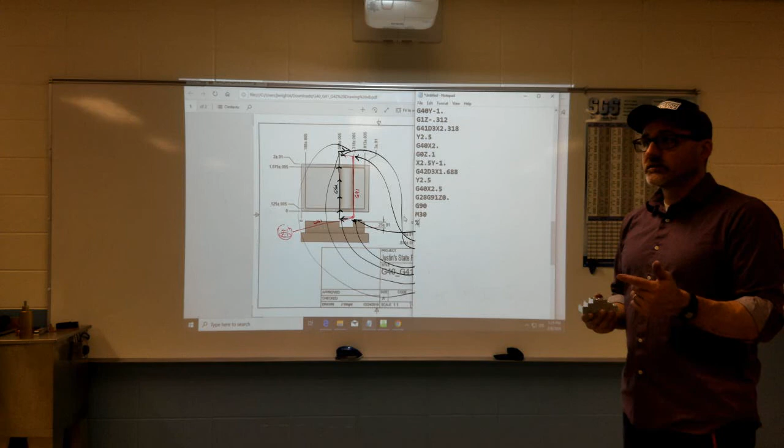Have you already run your first operation on your speed handle? So you need to run this project. You need to get that speed handle project worked in. After you do that project, everything from that feeds into this. So the new thing to this will be doing some holes. Yeah, G81, G83, G84. So no G82 out of there. And G85, we'll be doing everything on this with holes.

The steps on this, you're going to do almost the exact same thing that you did on this first program. You can actually use that same program, just modify it some. Then on this side, you take this 3-inch shell mill, come up this side, come down this side, G41. You don't even have to face this part off. And then after you get your steps in shape, you drill and ream these 5 holes on this spot on the side, drill and tap 4 holes on this side. It's less work than it probably looks like. But you need to get this guy done first.

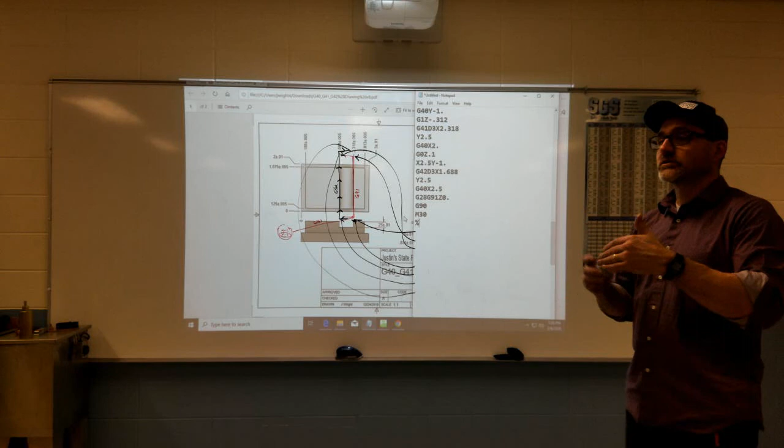When are you gonna have this part done? You gonna run it today? How late are you here till? I can run today. Okay. It'd be good for you to start to get those things caught back up.